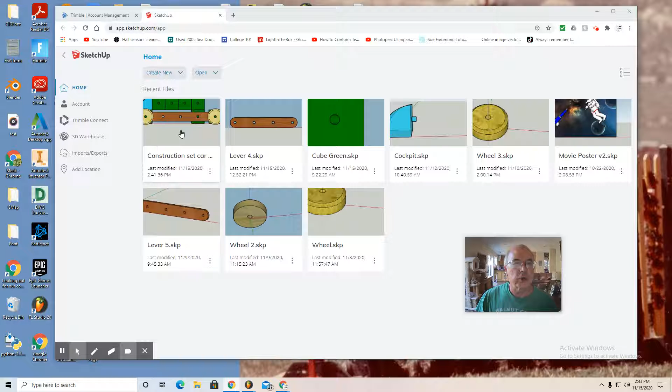Navigate to the SketchUp landing page you see here. Move to the upper right where you see the person icon, select My Apps. And then you want to navigate to the free version of SketchUp. And there's the familiar red logo. And there's my construction set car. Open.

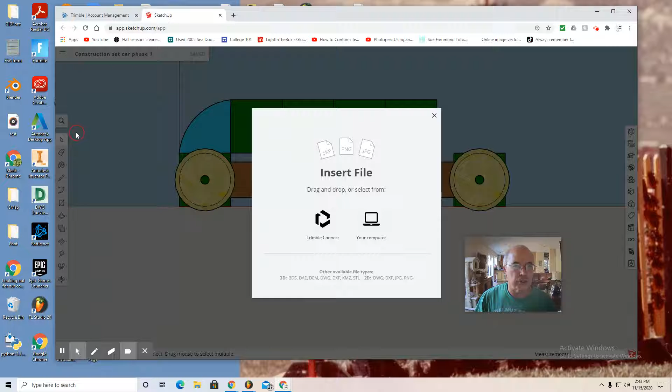Okay, I have removed the 4-hole lever because they were not lining up the way I intended, and I found a better way to align the holes. So without further ado, I'm going to use those 3 lines in the upper left to insert from Trimble Connect my 4-hole levers. And there's one, and insert as component. All right, so there's my 4-hole lever.

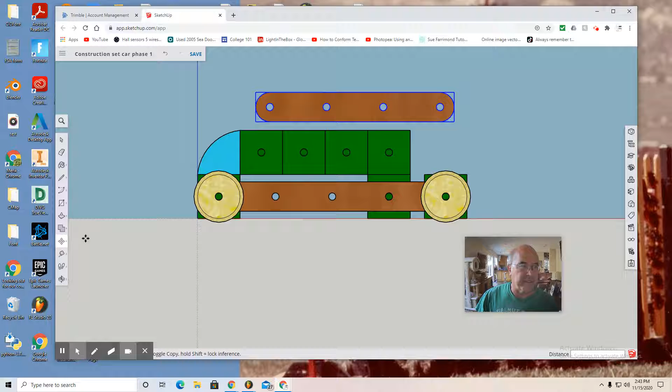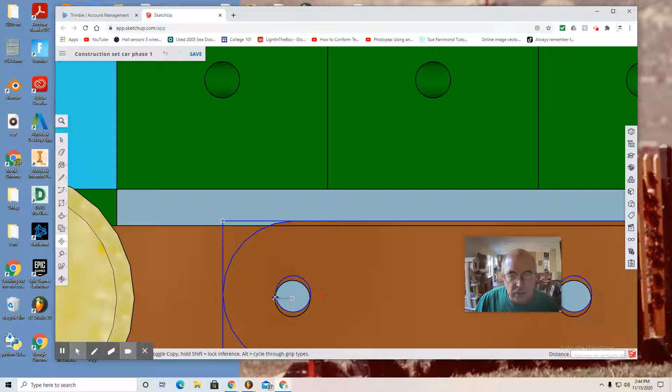And what I want to do is get this hole to line up with this hole and then angle my lever up this direction. So what I found, it's best to align the hole first before you rotate. What I want to do is grab the move tool. As I've showed before, you want to select the edge of the circle here and then drag it into position. And again, if it's close enough, you can snap it right into position. There. Oops. There. See how the hole is lined up in perfect sync.

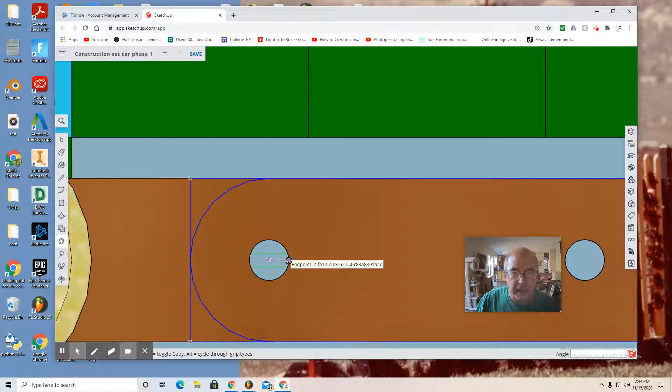Now I want to revolve. So I grab the rotate tool and rotate from the center of this hole. So I find that purple spot and I see the green protractor behind. So I select, then I move directly across and I see that little red line, which means I'm parallel with the red axis or the x-axis. I select the edge of the circle, click, and then I push up and rotate it. And that is the angle that I prefer.

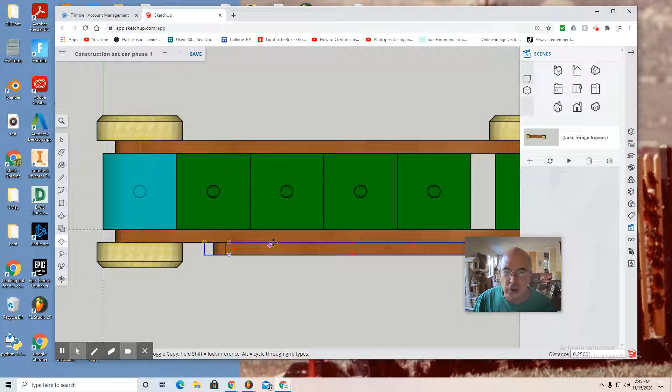Now I'm going to the top view and I want to grab the move tool. Do not deselect because you want to grab this inside edge of your lever, which is on the incorrect plane, and you want to select it and pull down. And keep in mind, you want to keep that little dashed line, you see it? It's green, which means you're absolutely straight up and down with the green axis or the y-axis. And then I let go, and my lever is now snapped surface to surface, and the holes are in perfect alignment. So the next step would be to add the second lever.

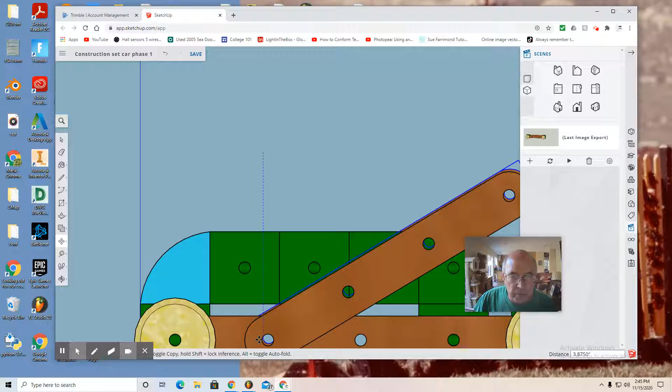So I'm going to select my lever once again and go Control C, Control V, and put that there. And once again, grab the move tool first because you want to grab the side of this hole and move it and snap it into position with the other hole. If you can see this, click, it's at the very bottom. But you see how the holes are in perfect alignment.

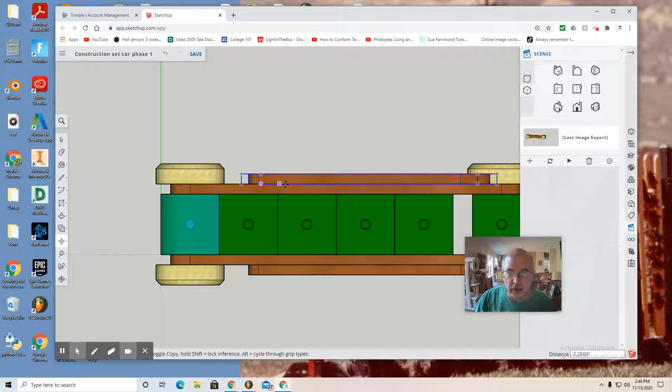But again, if you look at it from top view, one lever is right on top of another. So you want to take the move tool and press on that edge and then pull and keep that dash line nice and green so that your lever will snap onto the surface of this other outside lever, but the holes will remain perfectly in alignment.

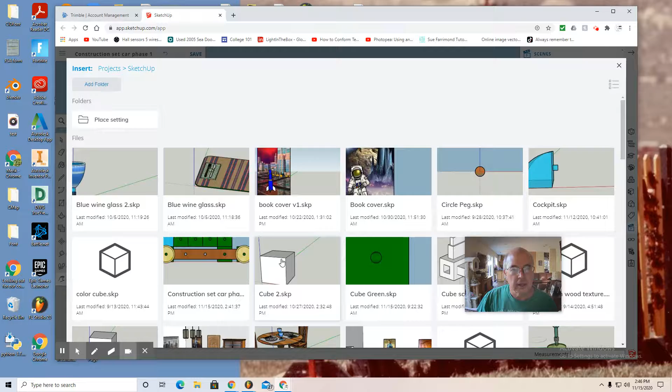So let's continue. I'd like to add some screws to make this look authentically constructed as a construction set toy would be. So I'm going to insert my screws now from Trimble Connect, double click, and we find the red screw that I formerly made and insert as component. As you can see, there it is. And one of the problems I am facing is that it's not in the right rotation.

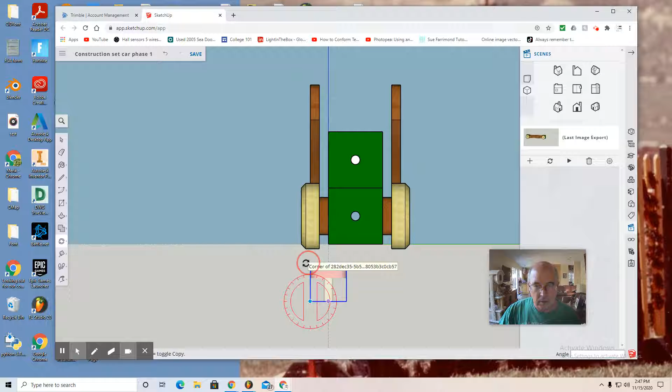So I'm going to look at it from right view, and I'm going to get the rotate tool and make sure I have a red protractor. Click one corner, go straight up, click, and then rotate 90 degrees, click. And again, look at it from front view, grab the move tool. I believe I can insert this from the center point of this by pushing and mating right to the center of this hole.

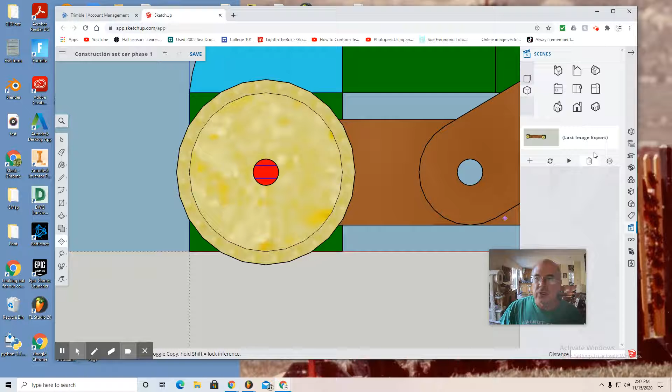You can see the screw is on the wrong plane, but it is still selected—you see the blue there, meaning it's still selected. So if I grab the move tool and find, well, let's say I want to snap it right to the surface of that wheel. The view isn't so great, so let me do that again for you.

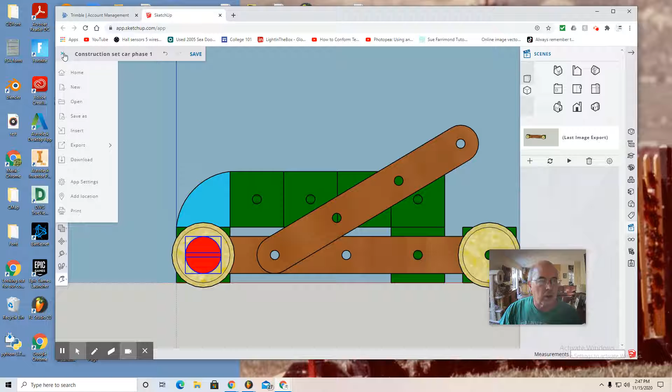Let's start by going Insert, Trimble Connect. Once again, find my red screw, insert as component, look at it from right view, rotate—again I need to make sure it's the red protractor—and rotate it 90 degrees.

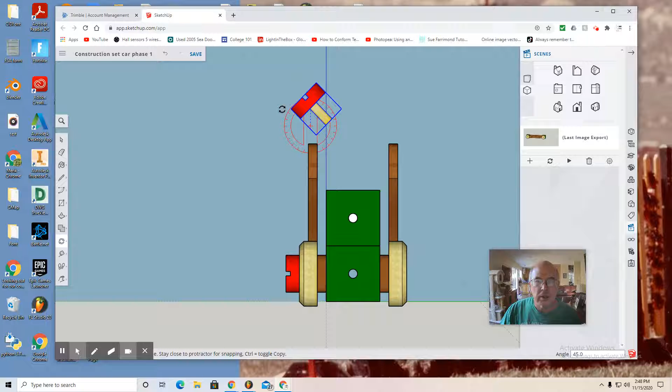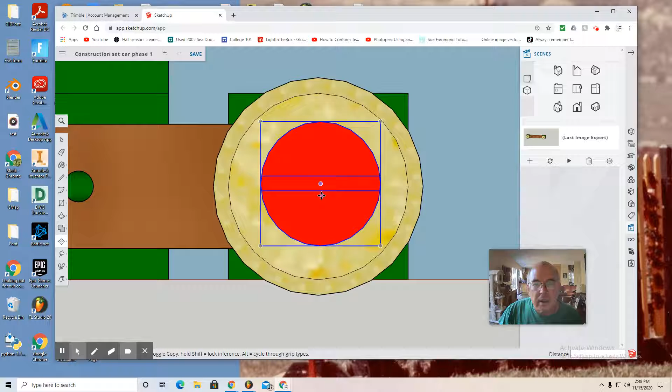Look at it from front view. This time I'll attempt to pan. Use the move tool, find the center, and drag it there. Now I can see center and center are aligned.

Then I look at it from top view and I can see that my screw is still selected—I see that blue line, and the partial screw there. So what I want to do is grab the move tool and find the inside surface of that screw.

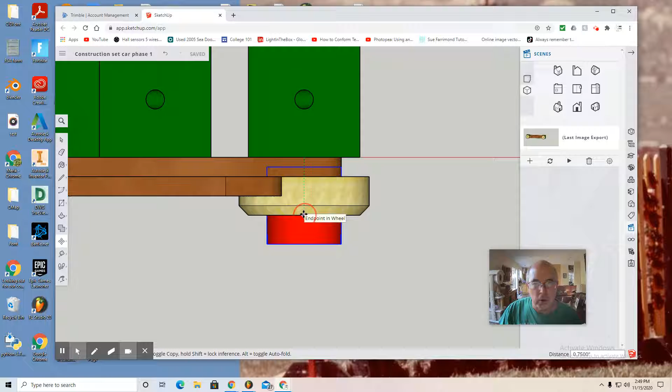And pull straight down so it snaps to the surface of the wheel. I also see the green dashed line above my 4-point cursor, which identifies that I've moved it directly straight and parallel to the green, I should say, y-axis. Let's look at it in front view—it looks like it's perfectly aligned, as you see.

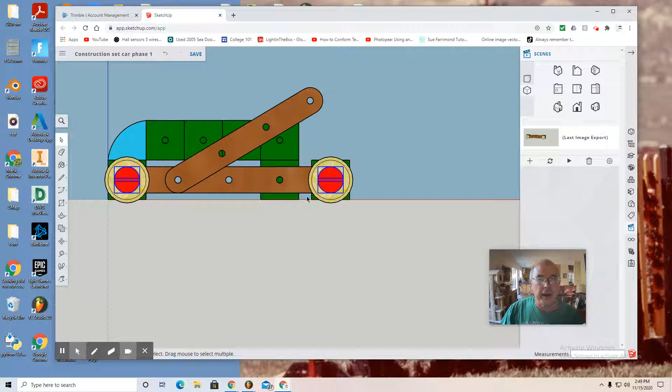Okay, so if I use the shift key—see, one screw is selected. So I hold the shift key and select a second screw. Now I have two screws selected, so I can go Control C, Control V.

And I produce two screws, then look at it from right view because I want to rotate these 180 degrees. Grab these, make sure I get the red protractor, and rotate it completely around, as you saw there.

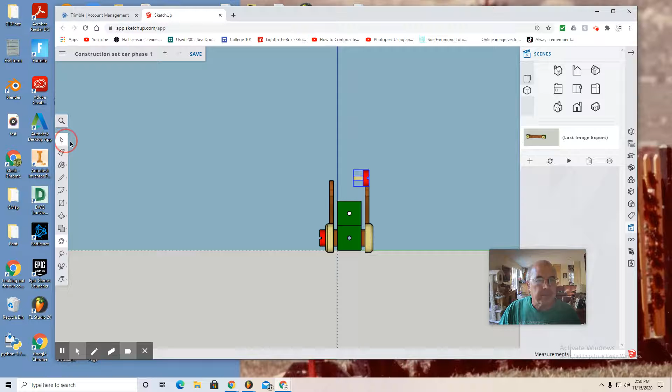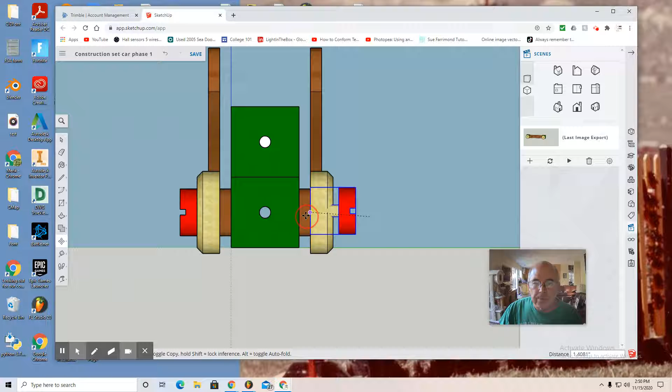Now I'm going to use the move tool, and I believe I can just position them. As you can see, I'm having trouble getting it to line up, so maybe grab this corner and pull it down. You want it to line up right with that lever right there, see?

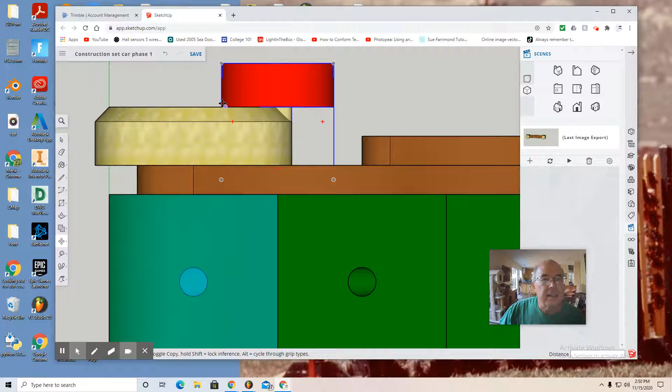All right, so let's do that. Then I can grab here and pull it so that it snaps. Then I'm going to need to look at it from top view, because what I want to do is pull this corner here—if you can get this corner right here, pull it across.

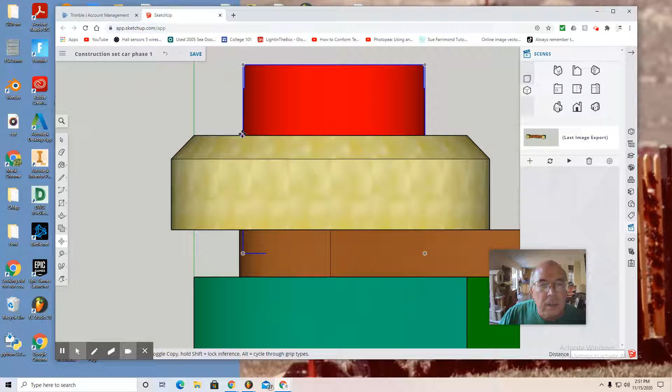Let me pan a bit. And I want to move this corner here. It should snap right to the edge of this lever there. And it looks like it's too low—bring it up.

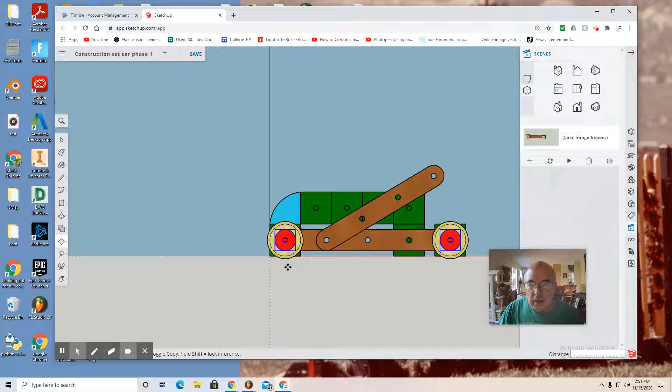I believe I did—nope. I don't know, for whatever reason, it put it on the wrong plane. So I'm going to move it back until it snaps into position there. Now I believe, yes.

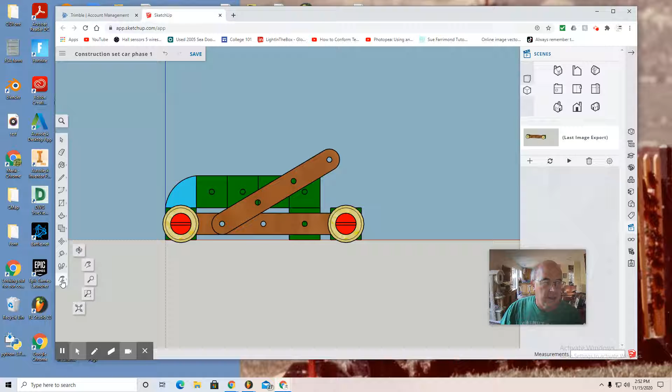As you can see, you have to be patient. You have to be tenacious. At this point, I can use the orbit tool. I can use perspective to get a final screenshot and position it.

Try to zoom in and position. We'll be adding more screws soon. At this point, I want to save my work.

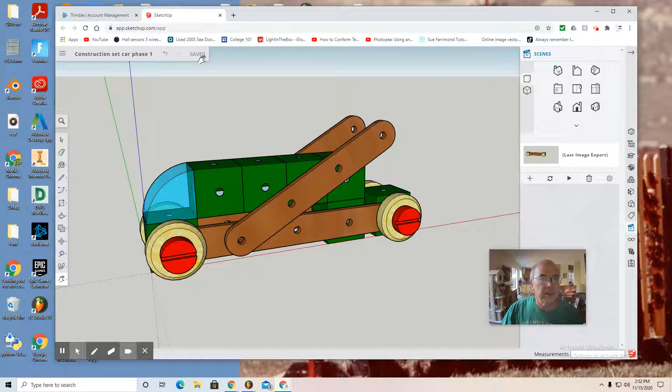Save. Just saving. Now that it's saved, I want to export as PNG—don't forget to click export as PNG. And when you see construction set down here in the corner, that means it's in your downloads folder. So you want to go to downloads and verify that image.